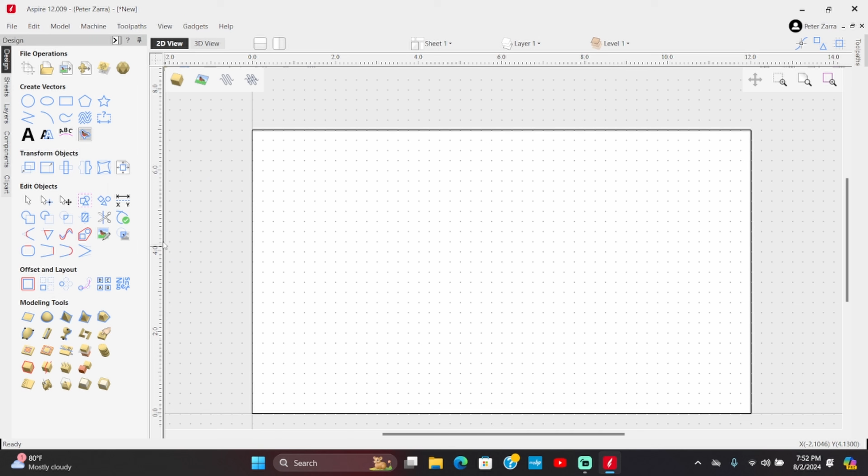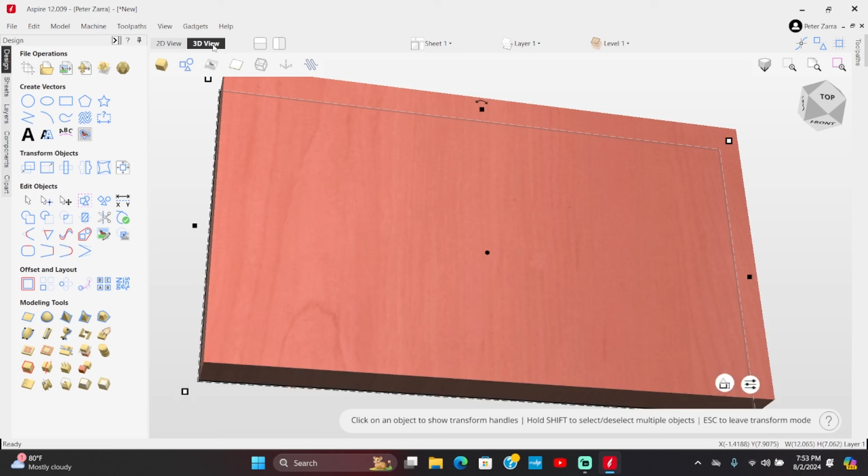Now we have created a vector around the whole perimeter, and we can select that, okay, and go over to modeling tools here. We're going to create a flat shape. So we go in here and we have our base height, and we want to put 1 in there for 1 inch. When we create that, we'll wait until it does it, and there we go. Alright, and then you just close it. Now what we've done is actually created a board that is 12 by 7 and now actually 1 inch thick, as you can see.

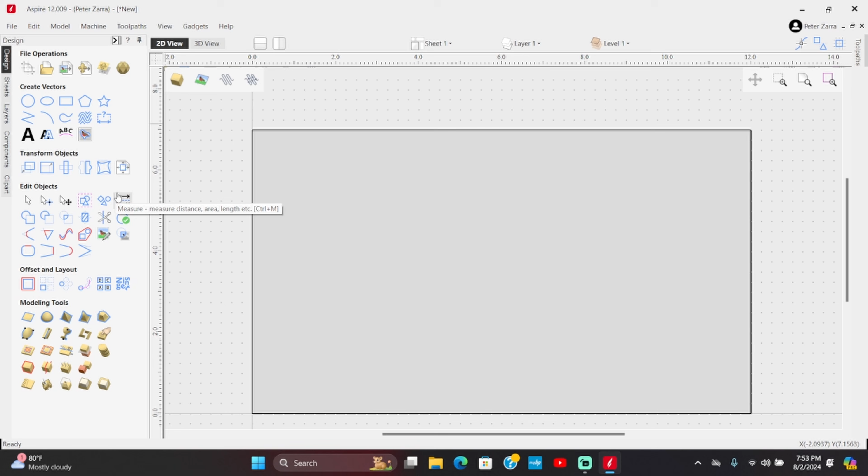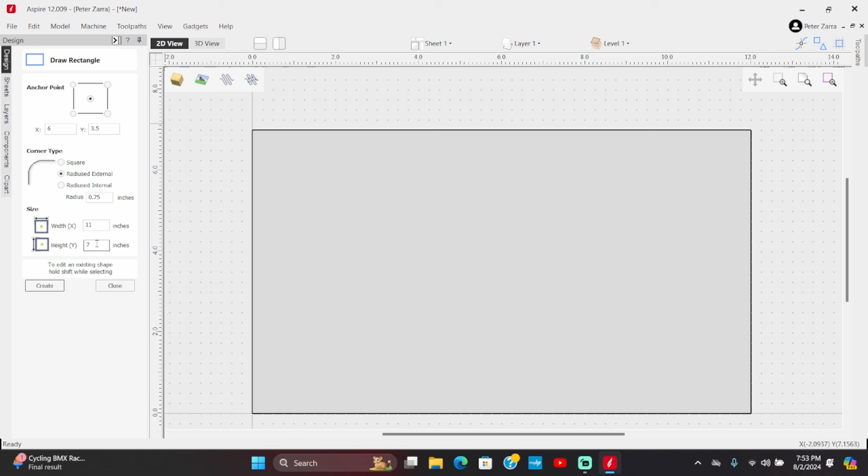So going back to the 2D view, now we can go and put in the actual lines for the tray. The first thing we're going to do is the actual dimension of the tray, and we're going back to drawing a rectangle. This time around we're going to do radius corners because we want that in the design. This outside is the perimeter of the tray, it'll have 3/4 of an inch radius on the outside, but the tray is actually 11 by 6. So we're going to go 11, change that to 6, and we have radius corners, so we're good. So we make it, and there you have it.

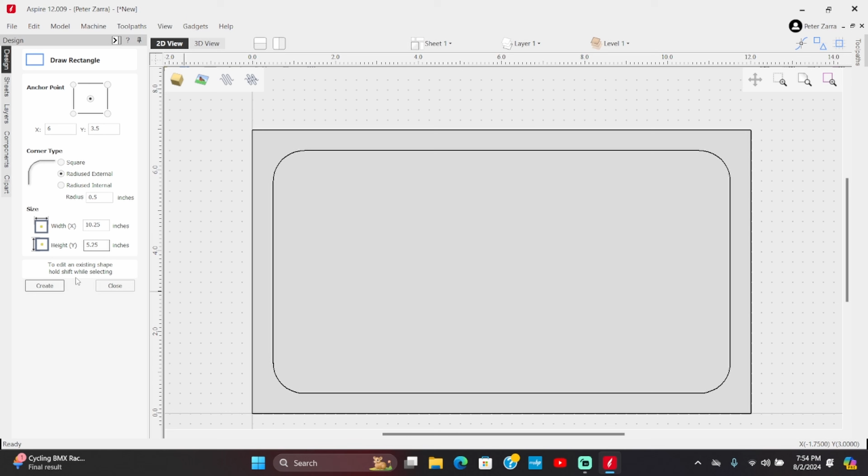Now that's the outside of the tray, and now we have to make the inside wall, let's say, of the tray. We're going to do the same thing again, and this time, because we're going a little smaller, the radius is actually going to be 1/2 inch on the inside. The dimension, depending on how thick you want that wall to be, I want this one to be at 10.25, and the height will be 5.25. Okay, there we go, we'll create that, so there you go. Now we have our outer wall and our inner wall of the tray. And believe it or not, that's it as far as designing it.

Now we just go over to the tool paths, and this is where it's real simple. So to start with, I will probably do the inside, and we're going to select the inside wall here. If we go over on our toolpath operations... Actually, first let me just double check our material, I just want to make sure nothing changed. Yeah, so we have 1 inch thick material. Everything here looks good, so that's fine, I just want to double check that.

But so to do the inside of the tray here, we're going to choose this option, which is called Pocket Toolpath, and you select it. And you have the start depth. This is important, we're going to start at 0 inches, which is the surface of the board, the very, very top of the board.

And then you want to go down to your cut depth, and you can vary that to whatever you like. I particularly like 5/8 of an inch down from the surface, so that's what I've already put in as my cut depth. That will be the floor of the tray, 5/8 of an inch down from the surface.

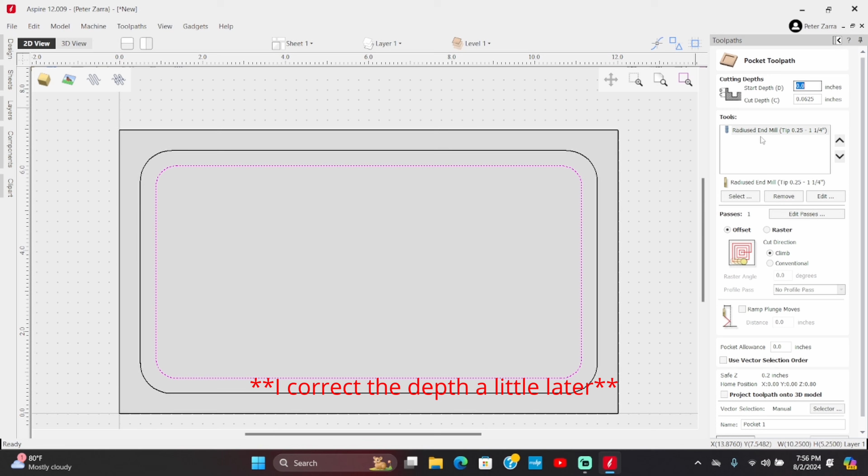I'll be using my radius end mill, already selected for this operation. Mine happens to be 1.25 inches in diameter with a 1/4 inch radius. It's a tray bit, so they're all pretty much a 1/4 inch radius at the bottom. That looks good, pretty sure all my settings are correct. On this one I'm going to use offset machining with a climb cut, and that looks all good.

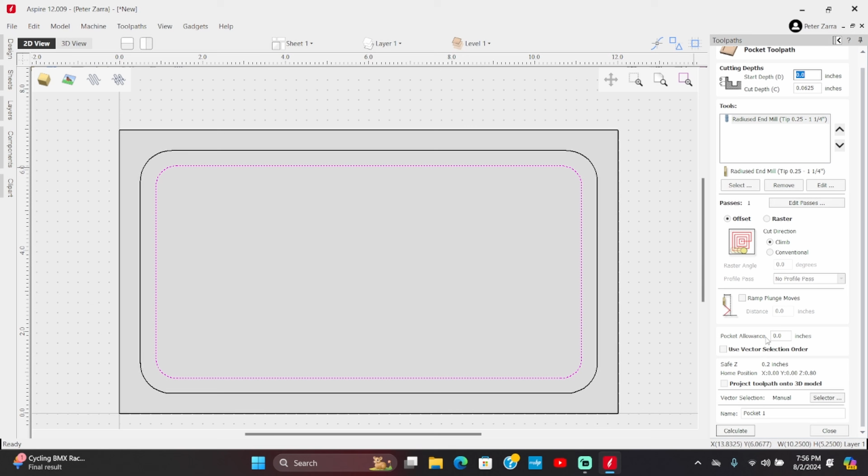I'm not going to ramp in on this, there's no need to do it. So that is fine, we'll calculate it, and this is how it's going to cut it.

All right, so now that we've done the pocket, we go ahead and select the outer edge, which is the profile, and click Profile Toolpath. Same process on this one.

We're going to start at the surface and go to a cut depth. This one will be 1 inch. I'm going to be using a 3/8 inch end mill, that's just what I happen to be using, and it's going to do it in 6 passes.

Now here's where I use mounting tape for mine to hold it. Sometimes I use tabs, and sometimes I don't. If you want to, you can add tabs from this selection here, but in this particular case I won't be using tabs. I'm just going to use mounting tape for both the inner part of the tray and the outer part, so I lock them in place so that once I cut this profile and the two parts are separated, I won't have the outer part kicking into the router bit and causing problems.

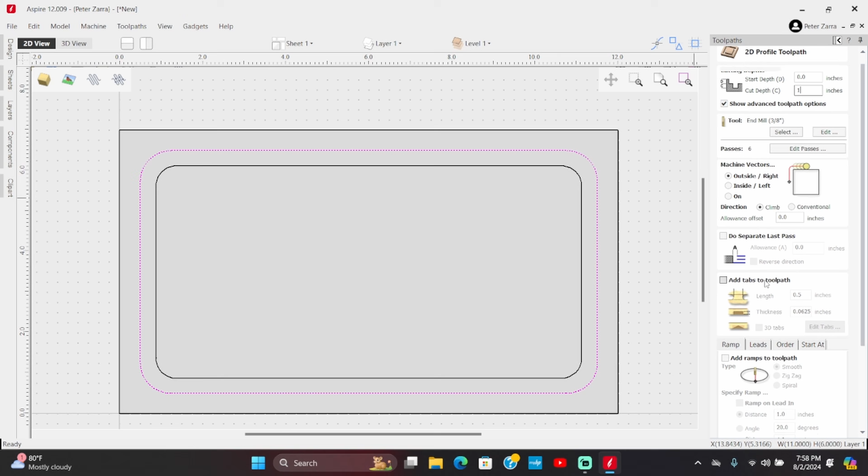But if you don't use mounting tape, then you have to add tabs to it. Generally you'd add one here, here, here, here, here, and here, and that would help stabilize it so you don't bang into the router bit. But other than that, I think everything here looks good, so we'll just press calculate, and it seems good.

Run it also - yeah, it did it super fast. So, for whatever reason, it didn't cut the depth as deep as it should have on the pocket. Let me just double check that.

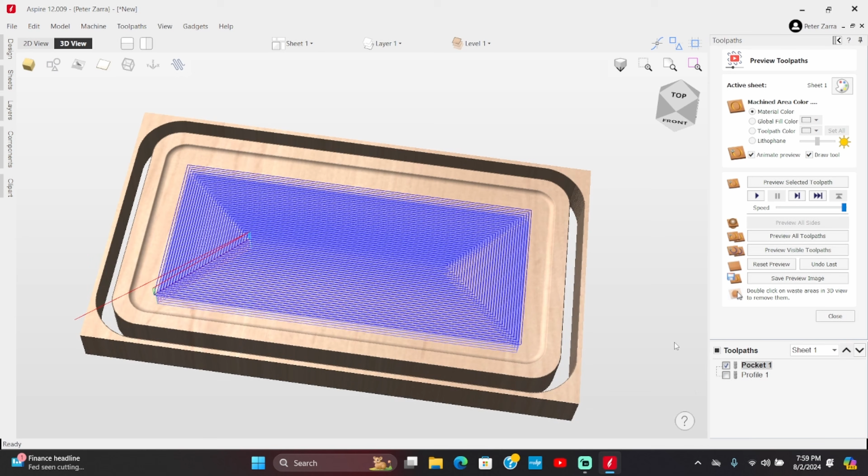I'll run that one real quick. And there we go, now it looks like a tray.

All right, so again, really simple to do. Not a lot involved in making a tray simple like this.

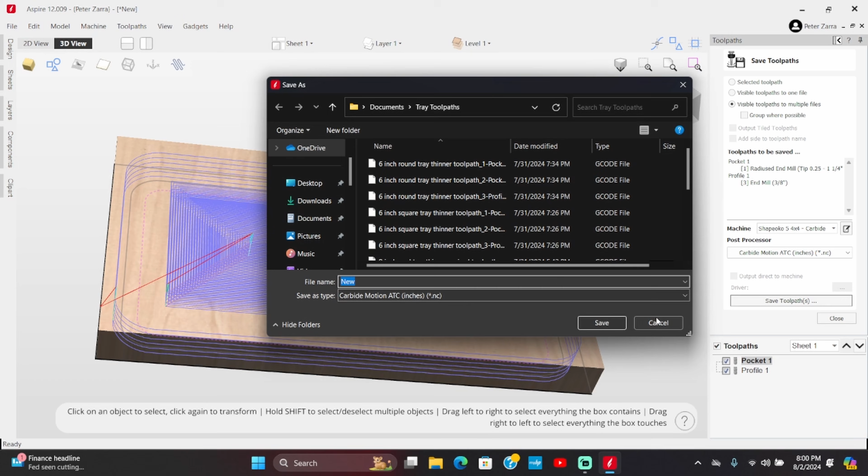From this point, I would just select my toolpaths here and click Save Toolpaths. I have it selected so all the visible toolpaths are saved, and I would click on this and it would create a file. I've already done all this, I'm just giving you guys an example.

So yeah, that's all that's involved in making a tray like this. It's very simple, it's one of the more basic design projects that you could do on a CNC.

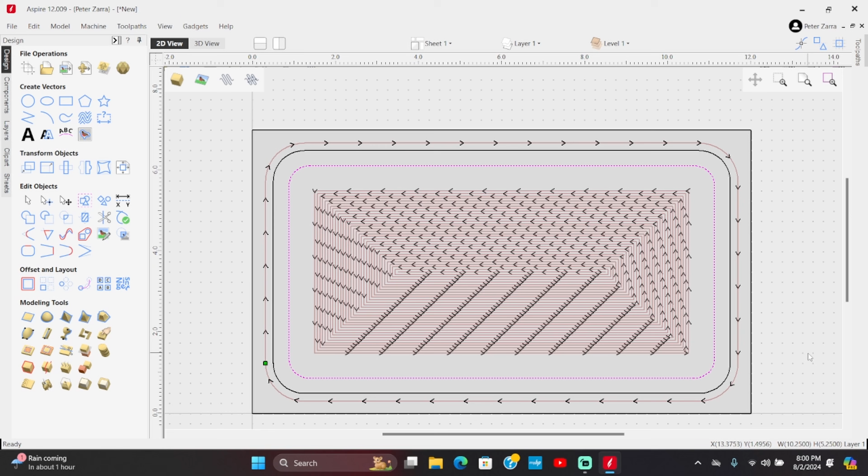All right, so from here, now we're going to go over to the machine and start machining one. First, let me go over the bits that I'm going to be using to make the trays.

The first bit you'll see here is the 3/8 inch 2-flute upcut end mill. These bits are both in 1/2 inch shank, that's what I use on my machine, and they're also available in 1/4 inch shank. They'll be a little smaller in size, but you can certainly find them in 1/4 inch as well.

So this bit will do the profile, it'll cut out the trays. Next to it I have a 1.25 inch bowl and tray bit with a 1/4 inch radius at the bottom, and this one happens to be 1.25 inch wide, and again 1/2 inch shank, and it will be doing the work of carving out the bowl on the inside of the trays. So that's it, those are the two bits I'll be using. It's really simple, and again either of these are available in 1/4 inch shank.

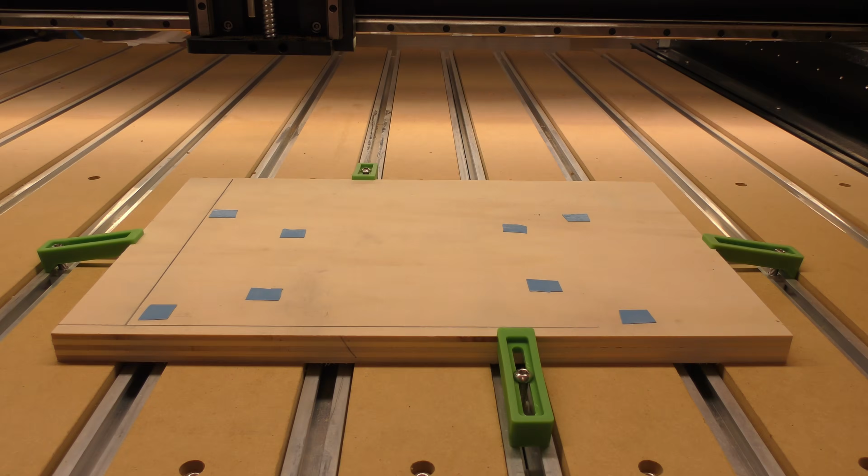So now that we've seen the bits I'll be using today to make the trays, I wanted to show you my setup on how I mount my boards to the table and what I use to mount it.

I really like this product. It's Gorilla tape, a mounting tape. It's 2-sided tape, and I started using it a little while ago and really fell in love with it. The stuff's so easy to use, and it's super strong, really thin. So it kind of makes clamping, I don't want to say unnecessary, but when you're going completely through material, this is the easiest way I've found to do it.

So let me explain what I've got here. I've got my sacrificial board underneath, so that when I'm cutting through the tray, it'll cut into this and not my hybrid table. This is firmly mounted with clamps so that it won't move. And again, this is nowhere near any of the bit, so I don't have to worry about the clamps being in the way or anything like that.

So for this example, I've got a piece of walnut for the tray, and this piece is going to be mounted like this on the sacrificial board, and the tray will be cut out of the center here, and then the outside is waste. So I have to use 2 different forms of tape, one to control the outside piece that's scrap and keep that from moving, and then I've got the inner tape to hold the actual tray itself.

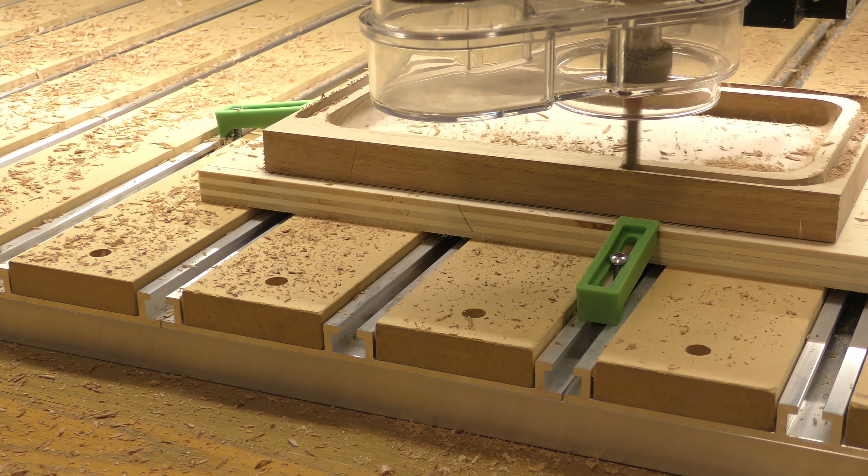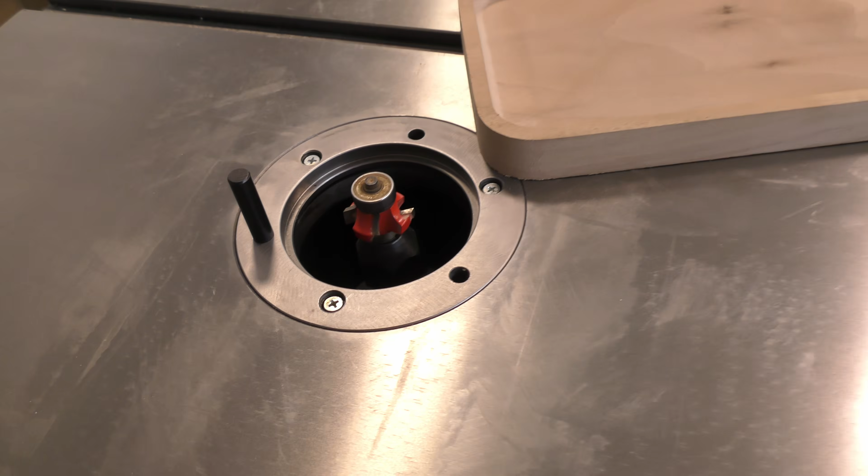All right, so this is what it looks like out of the machine. As you can see, the lines are very minute on the surface of the dish there. Really happy with that, and pretty clean. I touched up the edges a little bit, just because I sanded the outside edges just a tad because of the bearing that's going to ride for the round over bit, and I wanted a really smooth surface for that.

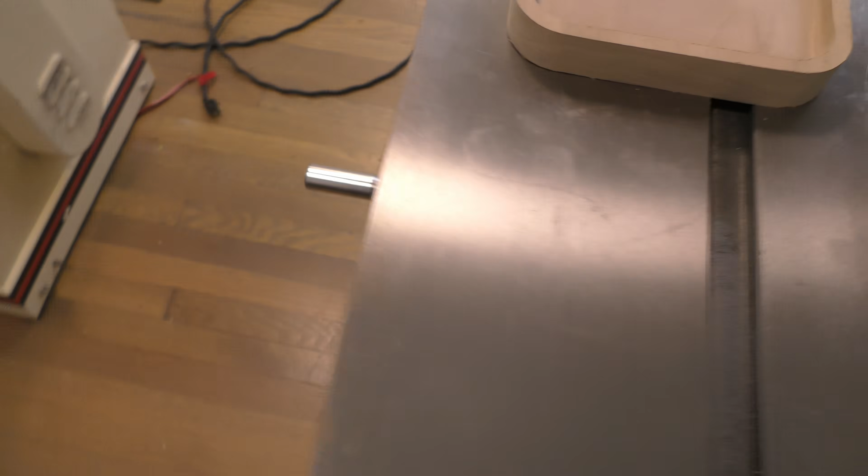So I'm over at the shaper right now. This is my new shaper, and it's from Grizzly. It's a Shop Fox, 2 horsepower. It's replacing my router table. My router died on me after 15 or so years, so rather than replace it, I just decided to upgrade and go with the shaper.

I'm still waiting for the shaper cutters to come, so in the interim I have a router bit spindle set up for it, and I'm just using a 1/4 inch round over bit on it. So I'm going to go ahead now and round over the edges, and let's see how that looks.

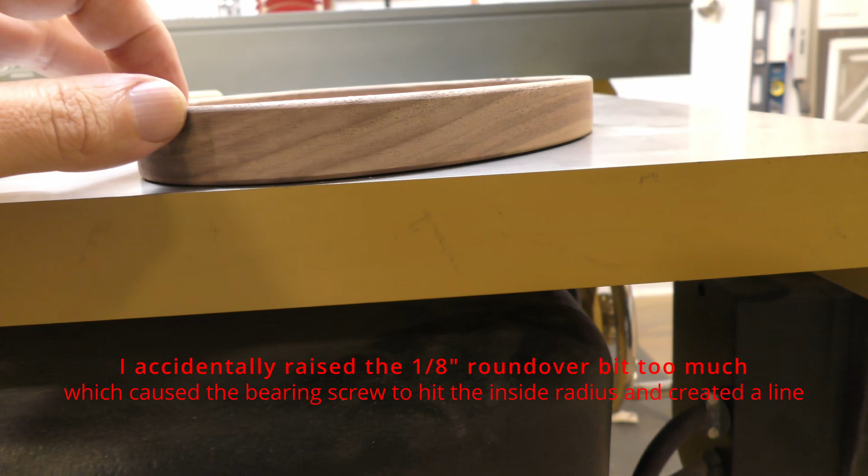I've been experimenting with the radius on the roundover. On this rectangular tray, I did it first with a 1/4 inch radius roundover, and I thought it was a little too big. Then I did the inside here in 1/8 inch, and I actually liked that better. So I did the oval one now with the 1/8 inch roundover, both on the outside and the inside, and I really like how that looks. It's a more subtle roundover.

I think the other one was just too much, a little too big. So, learning as I go here what I like, what I don't like, and refining the process. But I think I've got it pretty much nailed down as far as first doing a roughing pass on the inner part, then a final very light pass with a very tight step over. Gives a nice clean look on the inside, very minimal hand sanding to be done. And then I just cut the profile around the outside, and then do the round over. So it's pretty easy. All right, so I've got a few more to do. I'm doing a square one and a round one, and we'll see how that goes.

Okay, so these are the 2 last trays. I made the 6-inch square and a 6-inch round, both with a 1/8 inch radius round over on all the edges. Pretty cool looking. I think I've got the process pretty refined. There's very faint lines that would require very minute sanding to get that to come out before applying an oil finish to it.